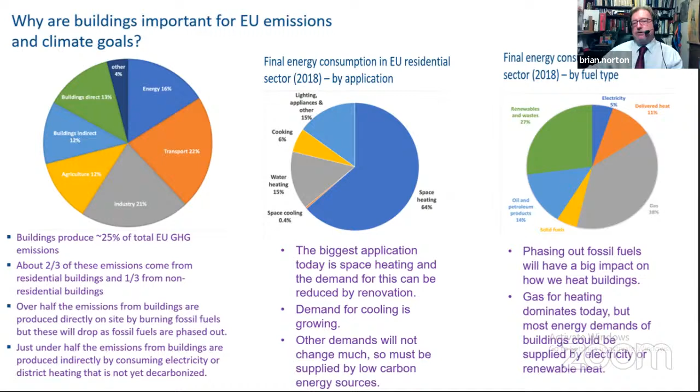So to mitigate climate change, one is seeking to replace the fossil fuel use with renewable energy in buildings, and more fundamentally, reduce the energy use in buildings altogether. So that's the big picture, and these are some European numbers on that.

So essentially the key idea in this is that the graph you see in the middle there, you see there's a target with an arrow in it, okay, and that target is where you want to get. And to do that, you need to do 2 things: reduce the energy use over time. So you see a line that's reducing over time, and then the energy use that remains, having reduced it, one's seeking to meet with decarbonized electricity and heat. In other words, electricity and heat that are coming from renewable energy sources.

So there are 2 things one needs to do. As the equation at the bottom, decarbonization of buildings is reducing the energy demand from building, and it is increasing the supply of that reduced demand from renewable energy sources. And part of that, as you see from the graph on the right, is building standards. The standards of thermal insulation, of air tightness, of efficiency of electrical appliances, etc., have increased over time. Okay, and for new buildings, those increased standards have reduced energy use.

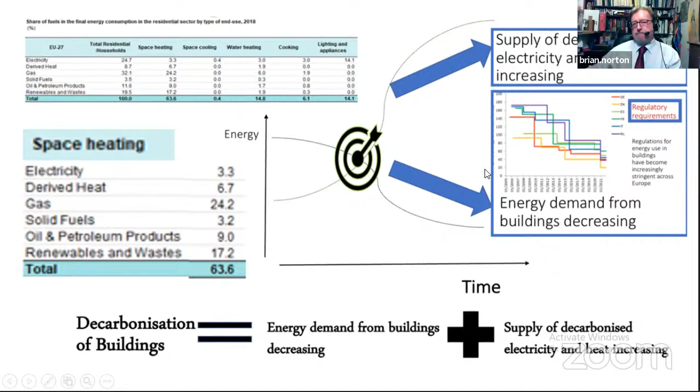So essentially, if you again look at new buildings, this leads you to the concept of a net zero energy building. And essentially what that means is that you normally have traditional building, which is in red on the figure in the middle there, and you seek to reduce that. So at certain times of the day, at certain times of the year, the building is actually producing energy. So it produces energy from PV, from solar thermal, from devices that are on the building, okay?

And that's either self-consumed within the building, or is supplied, for example, electricity from a PV array on the roof, supplied to the grid. And the net effect means that in balance, the building has net zero energy consumption. It has energy consumption, but it produces as much energy as it consumes, okay? And you get this idea of a net zero energy building.

And that is very good for new buildings, and you can see a whole range of little photographs of different types here. I show those photographs to show that although the concept is common to all these buildings, the architectural realization of those buildings is quite different. And so in a way, a net zero energy building can look like anything. There's no particular building style or aesthetic function, for example, that comes out of that descriptor. So it can look like a whole range of buildings. But the key thing is that one's seeking to have a net zero energy consumption, and that is readily achievable in nearly all climates for new buildings.

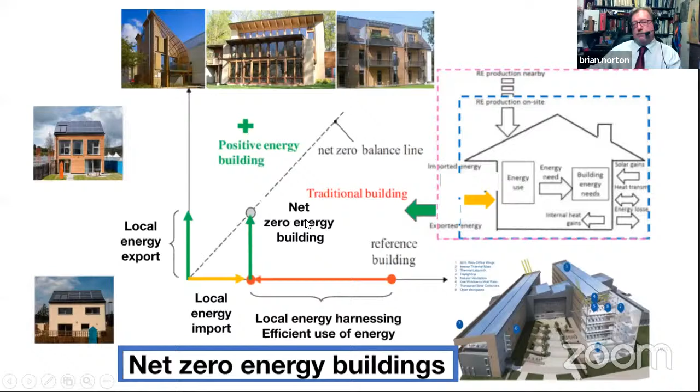One of the interesting things, however, around this is that when you look at net zero energy buildings, it's often seen as a goal, but it's calculated in terms of primary energy. In other words, the energy generated at the power station. And so the net zero energy depends to a certain extent on the losses, transmission losses and combustion losses, etc., at the power generation system. Now that obviously decreases as the conversion losses decrease as well, but

because of the way that is calculated in most calculations, the net zero energy building is actually meaningless to most homeowners. What they are concerned about is actually the figures on the left of this, which is actually the energy that's delivered to the building, how it's used, and what energy is needed, and so it's important when we're looking at these things to make sure that one's looking at net zero energy building from an occupant's viewpoint, not necessarily from the power system viewpoint.

And if you allow, for example, the primary energy calculation and simply replace that primary energy with PV, it means that you actually incentivize not improving the energy performance of the building, because you've now got a net zero energy building because it simply generates lots of electricity from photovoltaics, but it can still be an energy inefficient building in itself. So the important thing to think about when thinking about net zero energy buildings is achieving a net zero energy building with the balance of both energy efficiency and the idea of primary energy as well.

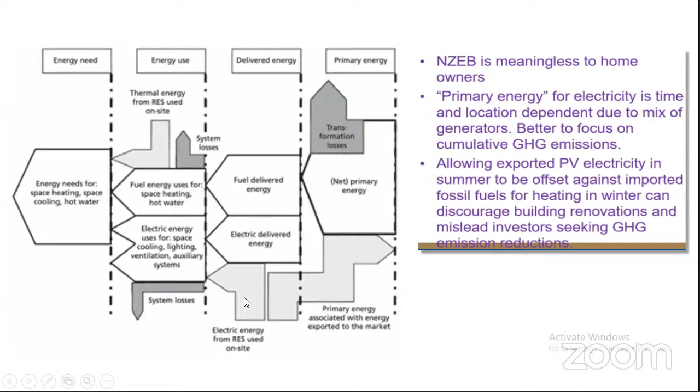So all that I just said applies to new buildings, but actually new buildings in all countries are very much the minority. This figure is countries across Europe, okay? And what these ratings are, I'll show you the buildings that have different energy ratings. The ones in green are the very high rated, very energy efficient buildings at the bottom there, and the ones in various shades of red are very energy inefficient buildings. Those energy inefficient buildings are older buildings.

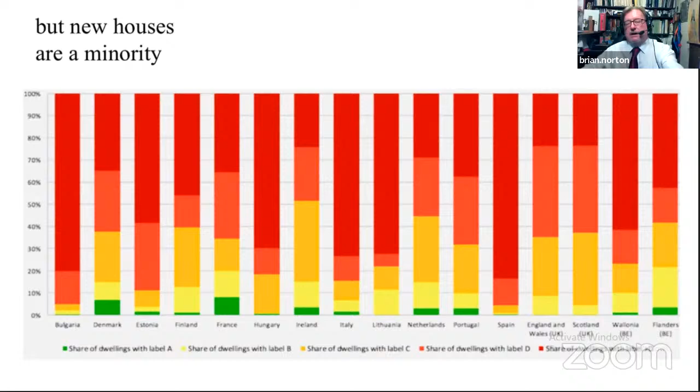Okay, so the new buildings are essentially the green at the bottom and some of the yellow, and the old buildings are the red. And what this graph shows you is that existing buildings are the majority. That's obvious, and that existing buildings have major problems in terms of their energy efficiency. So although net zero energy buildings can be readily achieved in the context of new construction, the real challenge is how you deal with existing buildings.

So again, an example in Europe of how to deal with this. This is an apartment block in Estonia, in Eastern Europe on the Baltic, and you see the building before and you see the building after. Okay, and what has happened to this building? And this is social housing. So the occupants of this building are paying rent to a social landlord who refurbishes the whole building and passes on the benefits of that to the tenants of the building.

And this is a building renovation. So what has happened is the fabric has been better insulated. There's been draught proofing. In other words, the air infiltration through the building has been reduced so that the heat losses because of warm air being lost from the building have been reduced. There's actually renewable energy generation on the roof. You can't see it in this picture. There's new windows which have very low heat loss.

Okay, and interestingly, you'll see before these balconies. In the final building, they're replaced with additional rooms in the buildings, and that's what's called a volumetric addition. The volume of the occupied space has been increased, and the reason for that is that the energy refurbishment reduces energy costs, okay, but provides few other benefits to the actual occupants of the apartments.

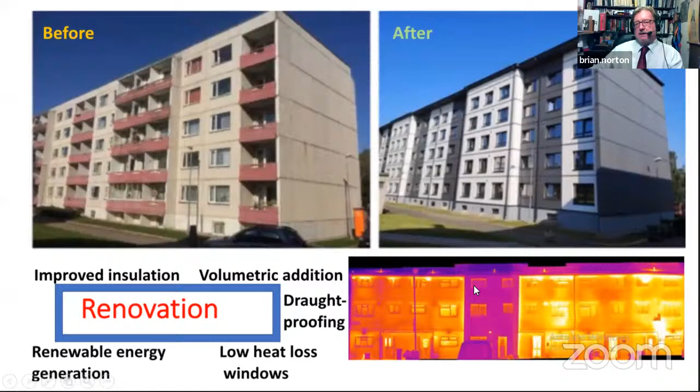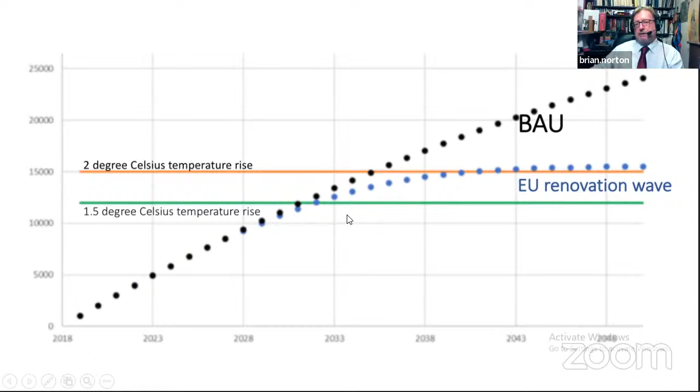And this shows the contribution of energy in buildings to overall emissions, which is very, very high, but also shows the importance of doing the energy refurbishment of existing buildings. Okay. That's a little bit of the context as to why this is important.

What I'm now going to go on to discuss is some of the key challenges in doing this, and it's not all of these challenges. We don't have time to discuss them all, but I'll try and give some time after I finish speaking to ask any questions on both what I present and also any other related issues. So I'll try and give time for questions at the end.

The first challenge is to do with how you actually know how much energy buildings use. All countries in the world produce statistics that show how much energy is used in their buildings, but no country in the world actually measures all the energy use of all the buildings. So how do they get to that calculation? What actually is done is buildings are rated, as you saw in the earlier figure I showed, from A to G, where A is your best and G is your worst.

Based on the rating of the buildings, one ends up with the theoretical rated calculation of energy use in that building, and then you sum up how many buildings there are in a particular jurisdiction. So essentially, building energy use at a national level is calculated theoretically, and there are no actual measurements underpinning it. Now, the problem with that: this graph on the left here is an example in the Netherlands, showing actual energy consumption and theoretical consumption.

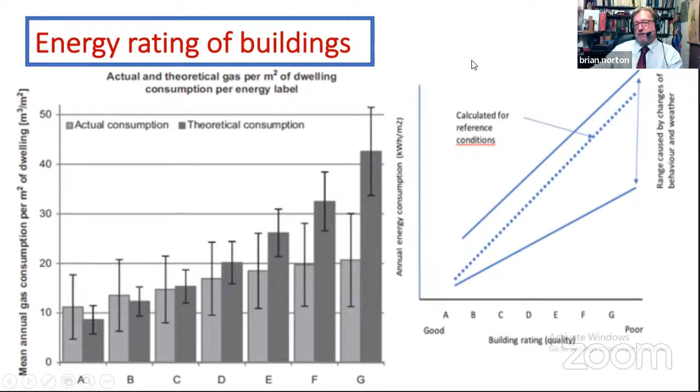The second issue I'm going to talk about in terms of challenges is buildings exist in an energy system. And as they become more efficient, that's increasingly the case. So you see here the buildings have the energy consumption in a sense, but also, for example, they have heat storage. They'll have batteries for the PV. Might have a fuel cell in the future. If you've got a photovoltaic on a building, the building's occupant is both a consumer of energy and a producer of energy, a so-called prosumer, and so is actively both providing energy to the system as well as receiving energy from the system.

But it also interacts with a whole complex set of intermediaries between the electricity producers, gas producers, and renewable energy producers. You might have district heating systems, for example, where waste heat from generation processes or from combustion of waste products is produced around a network that can go both into transport and industry. You have industrial processes that produce waste heat that could be used in buildings. Increasingly, for example, heat pumps are used in buildings for heating. They can produce surplus energy, just as a PV system can produce surplus electricity. A heat pump can produce surplus heat, and that can be distributed to other buildings, to other users.

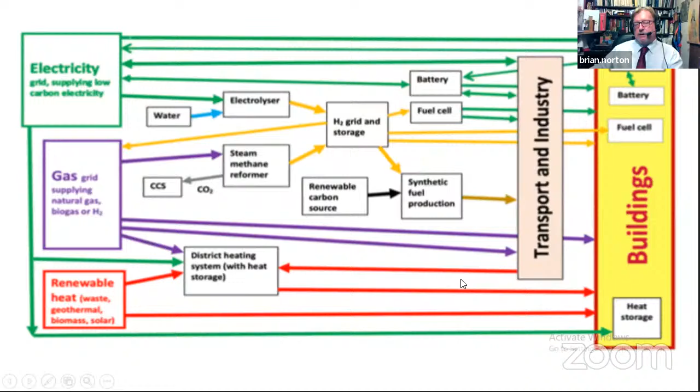Another very important issue is indoor air quality. And as I said earlier, one of the strategies to reduce energy use in buildings is to reduce the air change rate in buildings. In other words, you've either heated or cooled the air that goes into a space, depending on whether there's a heating or cooling load, and rather than having to continue to heat and cool that building, reduce the amount of air exchange going through the building. And that's a sensible strategy from one perspective. However, if you don't have sufficient airflow in the building, there's a whole range of issues to do with contamination, buildup of moisture, buildup of bacteria, viruses, mold, etc.

So there's a huge impact on health, and this is particularly relevant in the current global pandemic, where one of the strategies adopted in many countries to try and reduce the prevalence of COVID is to increase the air change rate in buildings so that virus-borne air is removed from the space and is diluted. So from an energy saving perspective, one wants to reduce the air change rate, but from a health perspective, one wants to increase the air change rate. So all this means that strategies for buildings need to have two things. If you're looking at providing warm air to a building, you're preheating that air, perhaps through glazed additions to the building, perhaps through air heated solar collectors, to reduce the energy consumption in heating the air.

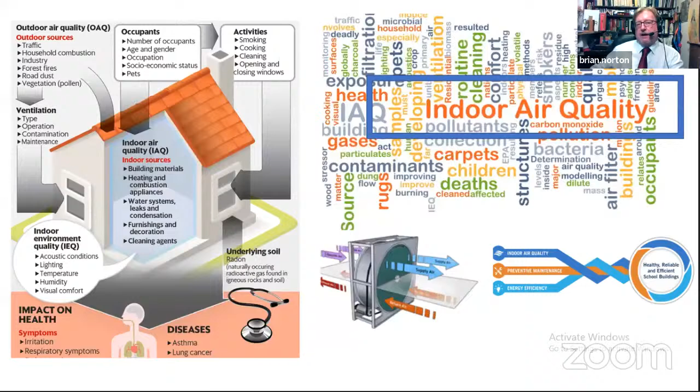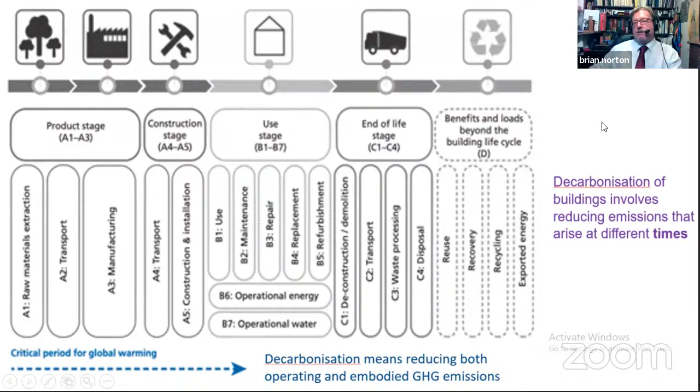And that leads us into the idea of life cycle emissions and the energy use in building materials. And here, in the sort of pink color, you can see the operating energy of a building with time. And an initial yellow there, which is the materials and energy used in its construction. And there's significant energy involved in construction. That's the first thing to say.

And your total greenhouse gas emissions are the greenhouse gas emissions for the building's operation, the embodied greenhouse gas emissions in the building materials, and those produced during construction, renovation, etc. And this comes into material selection, and this pyramid is a pyramid of the embodied carbon dioxide per cubic meter of a range of materials.

This is actually an example produced in Denmark, with the use of wood being at the bottom, because those trees have been absorbing CO2, and that CO2 is locked into those trees as wood while it's used in the building. Then you look at the top there of cement and steel, and newly produced cement and steel has huge high temperature processes associated with it, and high embodied energy, high embodied carbon dioxide in it. Now, that can be avoided if one uses recycled steel, for example, and it's not subject to further high temperature processes.

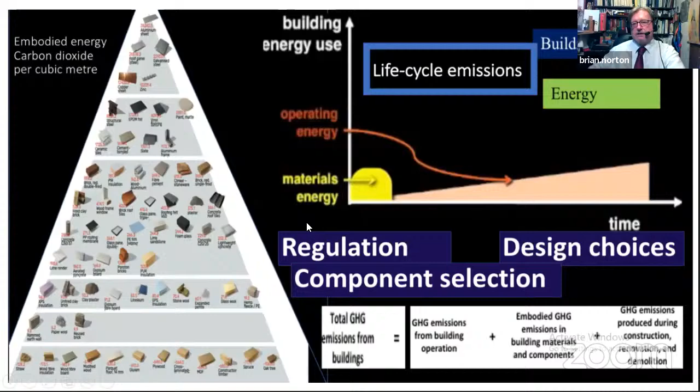Okay, this is important in terms of the renovation of buildings, because when you renovate a building, you are introducing energy in the renovation process, in the new materials you've introduced, in the better components. So it's not just new buildings. When buildings are renovated, there's an increase in emissions, and that increase in emission has a payback period until the reduction in operational energy has offset the additional emissions created by the materials in renovation.

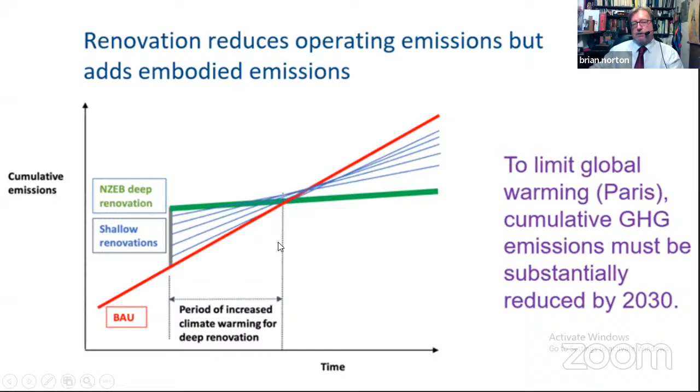Okay, one issue I just want to touch on before drawing to a close and inviting questions is all of this has financial implications, and particularly for existing buildings, how this is paid for is very critical.

There's someone in the background with a microphone on, if they could mute, if they would please.

So the finance of renovation is important, and this comes down to fundamentally an issue of what does the state pay for and what do individuals pay for. There's a public good in reducing CO2 emissions, which is part of national policy, and there's a private good to individuals of the energy savings that come and the benefit to them in energy savings.

All right, and the issue here is fuel poverty, and that if people are spending more than 10% of their income on energy, there's an idea of fuel or energy poverty, and those people do not have the ability to afford to renovate their building and need government intervention.

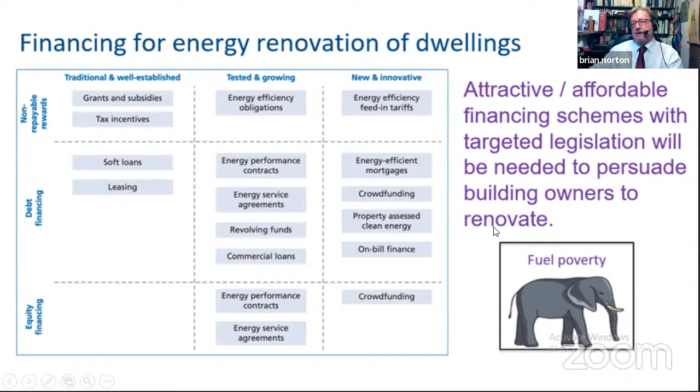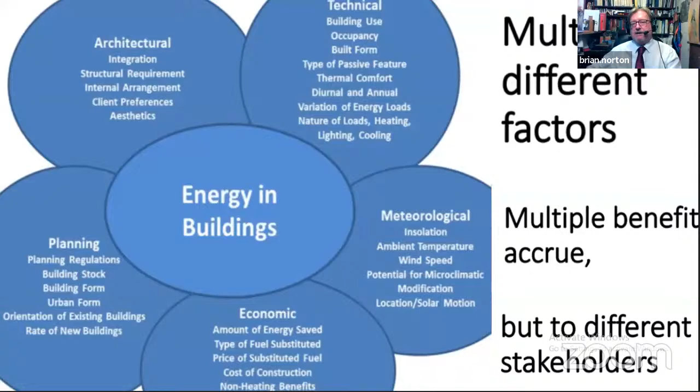Okay, to conclude, and then I'll invite questions. There are multiple different factors for energy buildings, and they're summarized in this figure. There are many benefits that accrue, but they accrue to very different stakeholders, as you can see, and it's important that we take those things into account. There's no single silver bullet. There's no single way to decarbonize buildings, and it needs legislation, it needs design work, it needs new technologies.

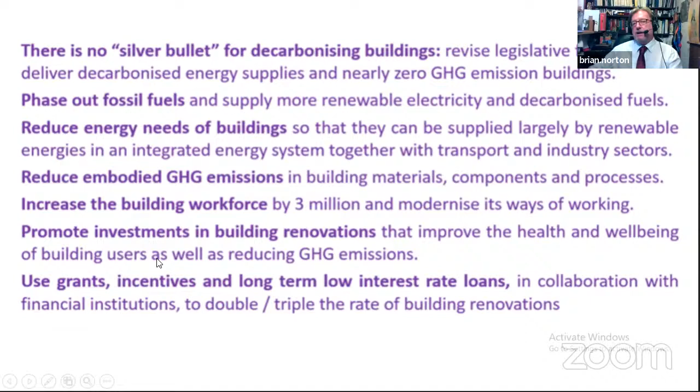Key is phasing out fossil fuels, reducing the energy needs of buildings, and reducing the embodied greenhouse gas emissions in building materials, components, and processes. All of this, by the way, actually creates jobs and modernizes ways of working. And there also is a whole range of interventions by government that promote investments and use grants and incentives. I'll conclude there. Thank you very much indeed.

There are two reports I'd advise if people are interested in this more. I chaired a group for the European Academies Science Advisory Council called Decarbonisation of Buildings for Climate, Health and Jobs. And that report is available at easac.eu, and is a very comprehensive report on this topic. There's a paper just published in the Proceedings of the Institution of Civil Engineers in the UK called Decarbonising Buildings in Europe, a briefing paper, and that's available in the most recent issue there, and also covers these topics as well.